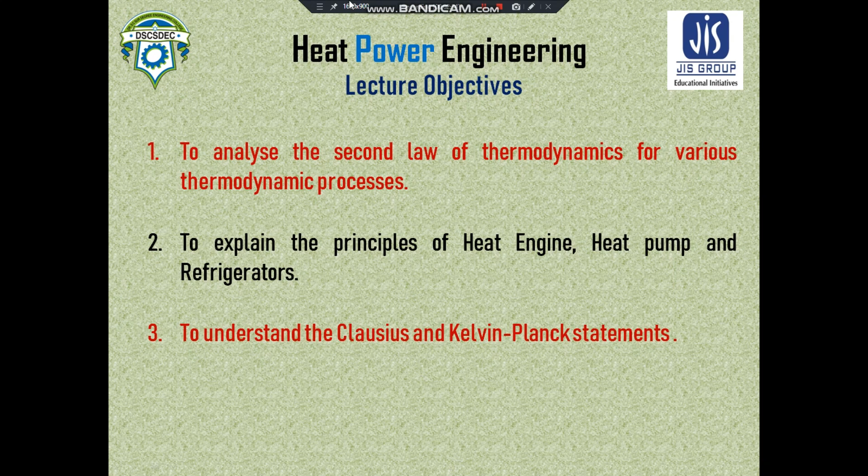Let us see how this can be understood. The first law of thermodynamics states that a certain energy balance will hold when a system undergoes a change of state or a thermodynamic process. But it does not give any information on whether the change of state or the process is at all feasible or not. So if you don't have the information about the feasibility of that process, you can't do the energy balance. This question is answered by the second law of thermodynamics.

Whether a process is feasible or not is a very important question. Suppose you are trying to create a design which involves some thermodynamic processes, but you don't know the possibility of occurrence of that process, whether it is at all possible or not. Then you can't move forward with that design, so you need to change it. If you don't have proper understanding about the second law, which is the most important axiom of the physical sciences, you can't move forward.

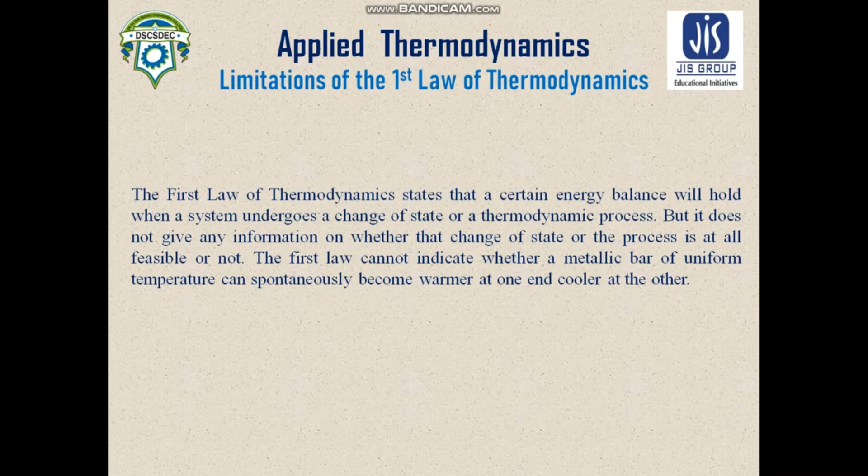Here is an example: the first law cannot indicate whether a metallic bar of uniform temperature can spontaneously become warmer at one end and cooler at the other. This can be a hypothetical process - a metallic bar is maintained at a uniform temperature, and someone proposes that it becomes warmer at one end and cooler at the other. This involves a thermodynamic process, but the first law can't answer this question. So to understand the possibility of occurrence, the feasibility of a thermodynamic process, we need to study the second law of thermodynamics.

So let us start with that. Before starting the discussion on thermodynamic processes, I would like to introduce the concept of directional constraints which are already involved with natural processes - that means in all possible natural processes, there is an inbuilt directional constraint.

Like water always flows from higher elevation to lower elevation. Heat always flows from higher temperature to lower temperature. Mass diffusion always takes place from the higher concentration to the lower concentration.

Here you can see a directional constraint which is always incorporated. This type of process is called a spontaneous or natural process. They have a directional constraint always incorporated within them, meaning you can change the direction of the process, but you can't specify that process as a natural one. So any spontaneous process has a natural directional constraint within it, meaning it can occur in a single direction only. To keep the process spontaneous, the directional constraints are always implied.

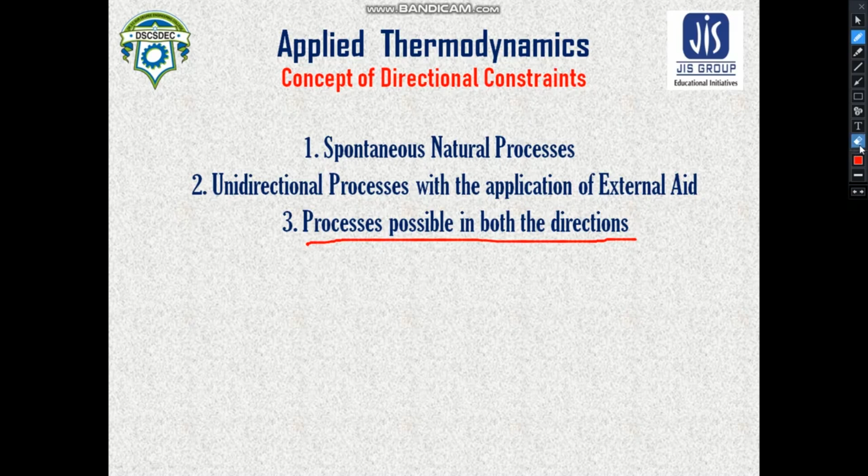These are examples of different thermodynamic processes that can occur, and in all of these cases there are some inbuilt directional constraints. This process can occur in a single direction, and if we need the opposite, there will be some directional constraints involved. If we discuss spontaneous processes, we always need an external effect to make possible the opposite of the spontaneous process. So if our wish is to make the opposite of the spontaneous process happen, we need to provide an external effect.

Now for processes that can occur in two possible directions, you'll see the surroundings gets permanently disturbed. This is the directional constraint involved here. Whatever you do, afterwards the surroundings will get disturbed, so no one can change it. This is going to happen. This is the directional constraint concept I would like to mention.

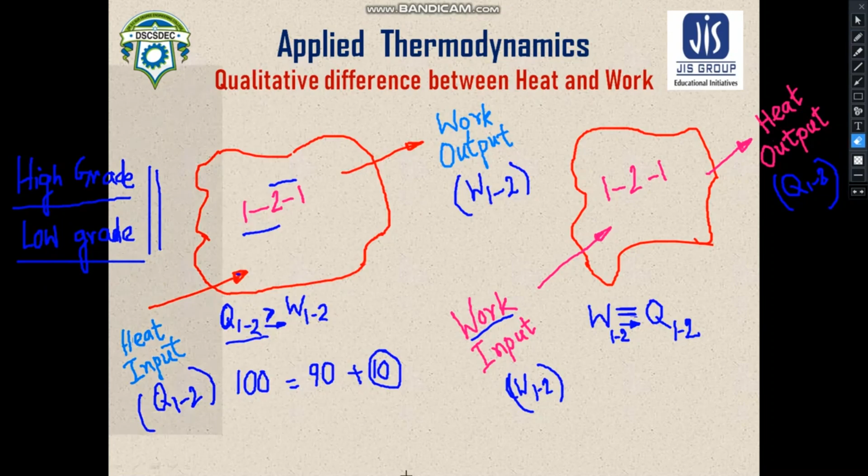Heat engine is a device where the system operates in a cyclic process to produce work when there is some heat input to the engine. So what does a heat engine do? It receives heat from the high temperature source, performs work, and rejects heat to the low temperature sink. Let us draw a cycle here.

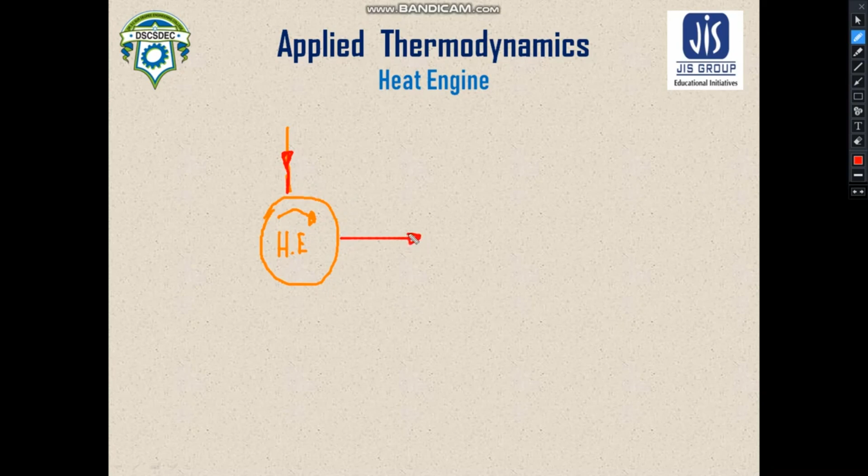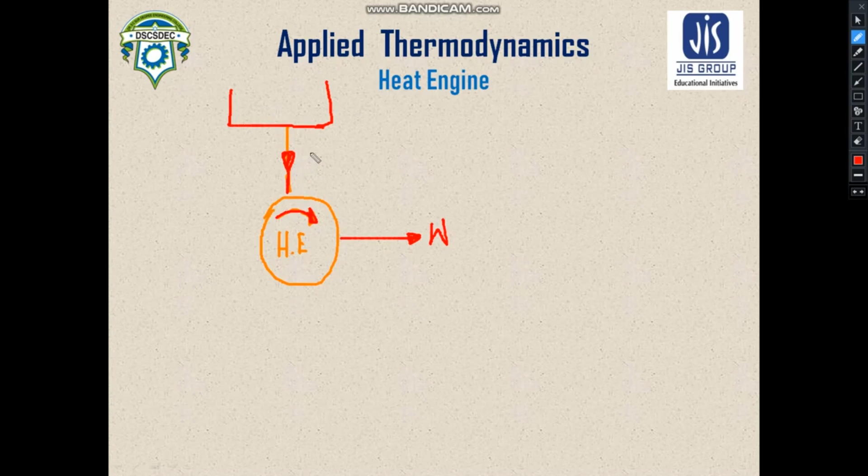Let us consider an engine working in a cyclic process. It takes heat and it is providing work. Now, how do you supply heat? The engine needs to be in contact with a high temperature body or high temperature system. We'll discuss these high temperature systems later on, but let us discuss the mechanism of heat engines. It takes heat from a high temperature reservoir and gives some work output, and the rest of the heat is rejected to a low temperature sink.

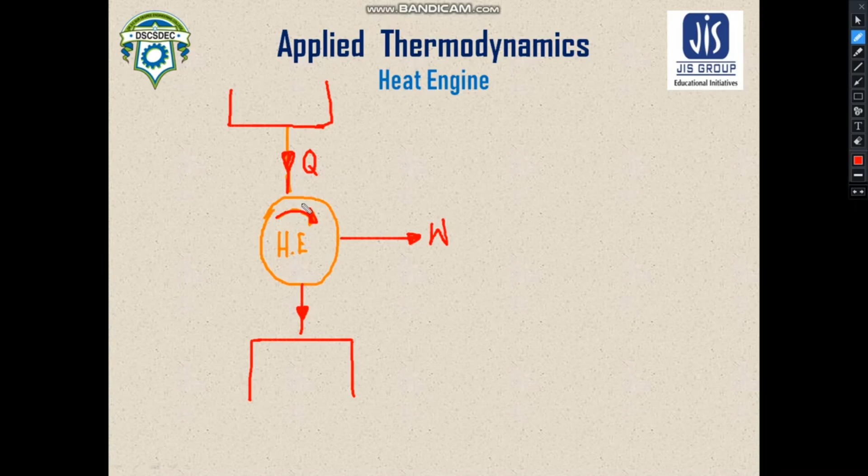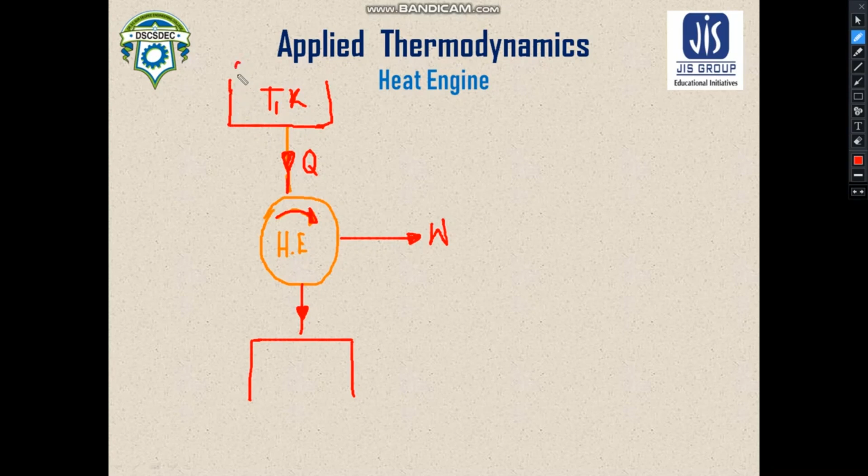So heat addition is taking place, which means this heat engine should be in contact with a high temperature reservoir. Let us assume the temperature of this high temperature reservoir is T1 K, and let us call this reservoir the source. Let us take this heat addition as Q1 and this heat rejection as Q2, and here is your low temperature reservoir, which we call the sink.

So what are the specialties of these thermal energy reservoirs? The source and sink are called thermal energy reservoirs. What are the specifications of these thermal energy reservoirs? They have infinite heat capacity, meaning that after a certain amount of heat transfer, the temperature doesn't change. It remains as it was earlier.

So we can take the examples of boilers or high temperature furnaces where the temperature remains constant. Boilers can be taken as the example of sources or high temperature reservoirs from which heat is rejected to the engines to perform some work, and after that the temperature remains constant. So there is no change in the temperature. They have infinite heat capacity.

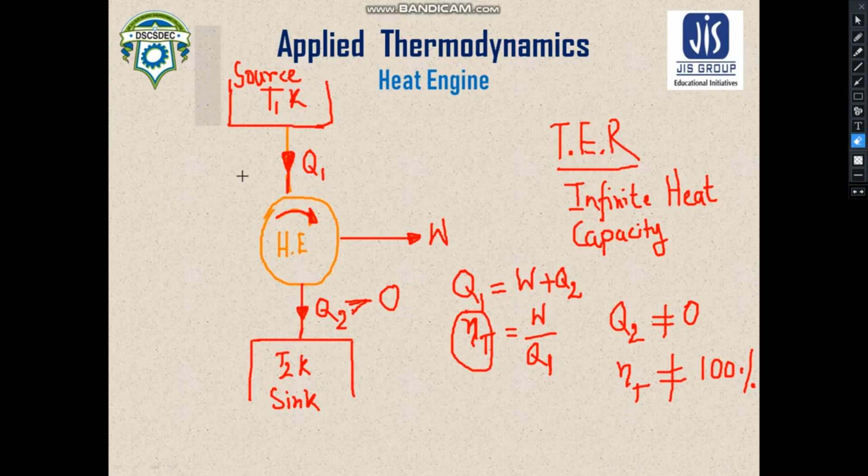Now from this understanding, let us see the Kelvin-Planck statement of the second law of thermodynamics. Here is the Kelvin-Planck statement: it is impossible for a heat engine to produce net work in a complete cycle if it exchanges heat only with a single fixed temperature. If we draw a heat engine, it will help you understand in a much better way.

So let us take this as the source, which is maintained at a temperature T1, and it is taking heat Q1 from the source. So this is your heat engine here.

So this is your heat engine here, and you see that this Q2 is equal to 0. So this is your W net, and here this W net becomes equal to the heat input, that is Q1.

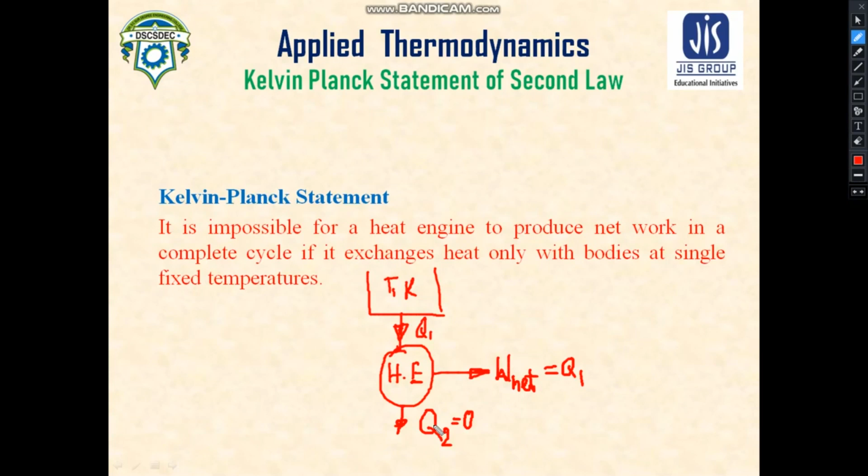Now I have told you earlier that this heat rejection can never be 0. That means it is impossible for a heat engine to produce net work in a complete cycle if it is exchanging heat only with bodies at a single fixed temperature. By this statement, it means the source. If the heat engine only interacts with the source, then it can't produce continuous work output, because there has to be some amount of heat rejection always, and to reject this heat there should be another body present with a different temperature. That means a sink should always be present. So whenever you see that there is no sink present, it doesn't accomplish that this engine can produce continuous work output. This is a very important statement of second law.

So with this understanding, let us deal with a hypothetical concept which we call as perpetual motion machine. So the diagram which I have shown you just a few minutes earlier, it is the same. So this is your heat engine. I will draw it in a much better way, I promise that.

Now this is your source which is maintained at T1 temperature, the absolute temperature is T1 Kelvin. It is receiving heat Q1 and it is rejecting nothing, that means this Q2 is 0. This we have just now discarded, which is not at all possible according to the Kelvin Planck principle discussed here. That means here you can see a hypothetical machine, a perpetual motion machine 2, which is interacting with the source only.

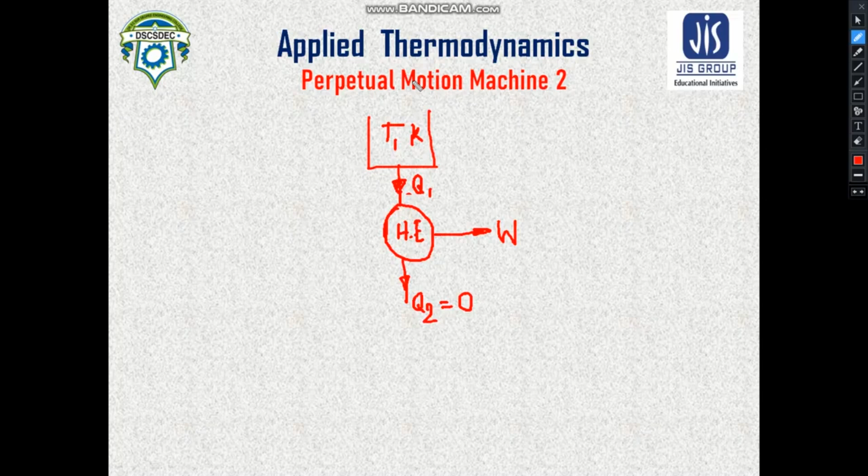That means it is interacting with the single fixed temperature and it is providing continuous work output. In other words, here you can see a heat engine which is 100% efficient. So these two statements, the engine is 100% efficient and it is only interacting with the source, these two statements are violating the Kelvin Planck statement of second law of thermodynamics. So this is perpetual motion machine 2; we have already seen perpetual motion machine 1 in case of first law of thermodynamics. From this understanding we can easily sense that this perpetual motion machine 2 cannot be practically done, it cannot be designed in practical cases. So there is nothing to discuss about this 100% efficiency. Heat engine can never obtain 100% efficiency.

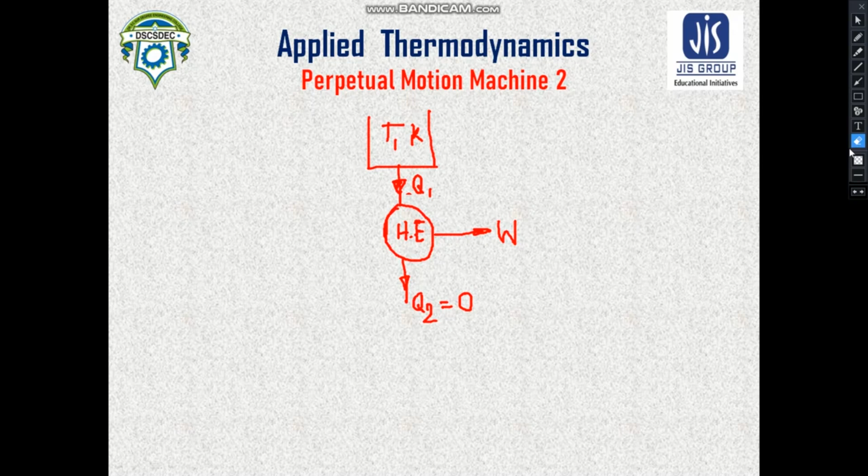So with this, let us see the reverse case of heat engine. In case of heat engines, we have seen that it is taking heat from a high temperature reservoir and it is rejecting heat to the low temperature reservoir, and within that it is giving some work output. So heat engine always takes heat from the high temperature reservoir and provides some work output, and after that some amount of heat is rejected. This is the basic mechanism by which a heat engine works.

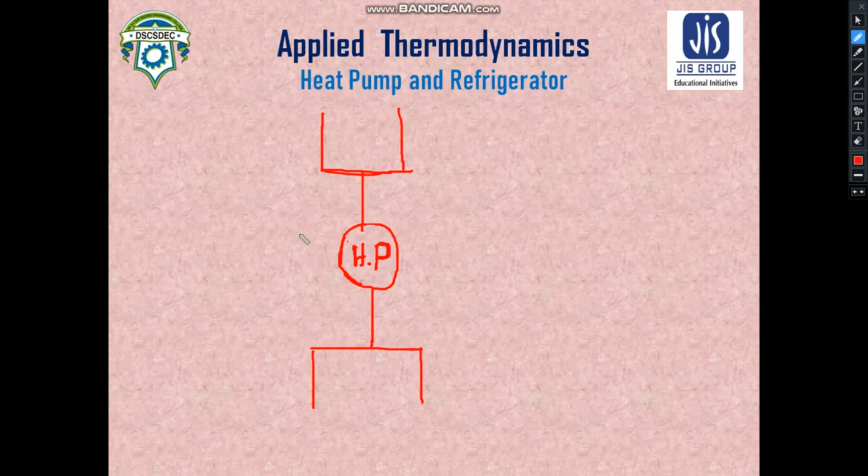Now let us take the opposite of the heat engine. Let us discuss what we mean by heat pumps or refrigerators. So this is your source. This is a general consideration that we take the source as T1 temperature and the sink is at T2 temperature. Since the source and sink have infinite thermal capacities, their temperature doesn't change.

So now let us do the opposite of heat engine. Heat engine was receiving heat from this high temperature source, right? Here the heat pump will receive heat from this low temperature sink, and it will reject heat to the high temperature source. Now you know that heat can't flow from low temperature to high temperature, so obviously T1 is greater than T2. If I haven't mentioned T1 greater than T2 in the case of heat engines, please check it and correct it, because if T1 is not greater than T2, then this heat engine or heat pump will not work. It is already given, it is a perfect assumption. So now let us move on to the discussion of heat pump.

A heat pump takes heat from a low temperature reservoir maintained at T2 Kelvin, and rejects heat to the high temperature source maintained at T1 Kelvin. Now this is exactly opposite to the spontaneous process, meaning heat can't spontaneously flow from low temperature to high temperature.

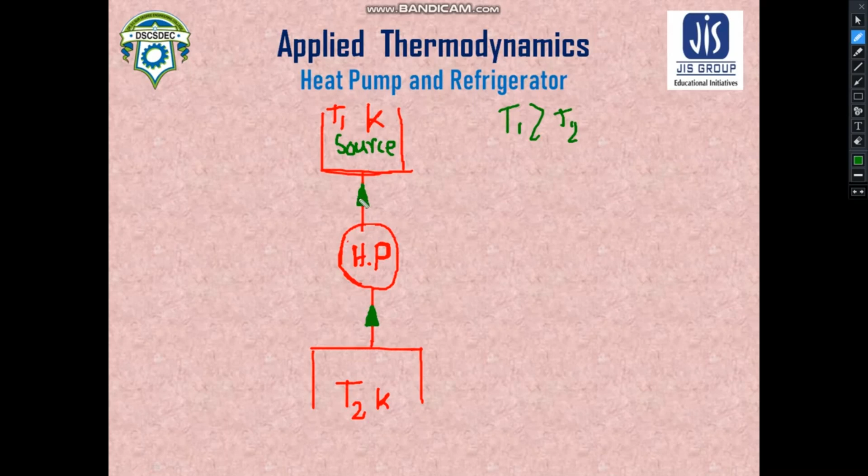So you are trying to act against nature. How can you do it? You need to put some external effect. This external effect is the work input to the heat pump. Until you provide this external work input, the heat pump will not be able to transfer heat from the low temperature reservoir to the high temperature reservoir.

Let us take this heat which is transferred as Q2 and Q1. If we perform the energy balance, you will see W is your work input, and this is Q2, which will be equal to Q1. This is the basic energy balance. Here W is the work input, so that the heat pump can transfer this low temperature heat.

There is work input to the heat pump, so that it can transfer this Q2 heat from the low temperature reservoir to the high temperature reservoir. So this W and Q2 were your energy inputs, and Q1 is your energy output.

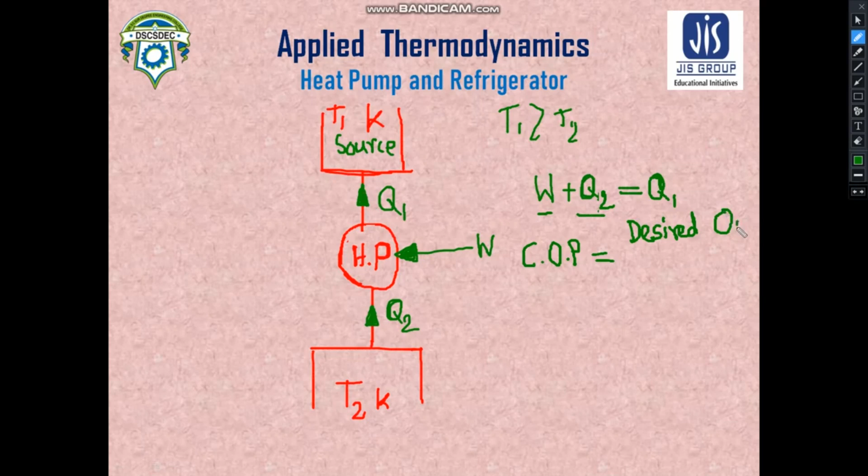So how do we measure the performance of a heat pump? To measure its performance, we define a term COP, called the coefficient of performance. COP is defined by the ratio of desired output divided by work input.

Now what is your desired output here? Your desired output is to transfer this Q2 heat, and for that purpose W work is given as input, and finally this Q1 heat, the high temperature heat, is rejected to the high temperature source. So your desired effect, when we are concerned about this high temperature heat Q1, the device is called a heat pump.

When we are concerned about this low temperature heat, the device is called a refrigerator. A heat pump is used when you need to keep your room warm and the surroundings is at lower temperature. Heat will flow from your room to the surroundings at a certain fixed rate. Now you provide some external heat input to your room so that it balances the heat going outwards. Here comes the importance of a heat pump: by its help, you can transfer heat into your room so that it balances exactly the heat going out to the surroundings.

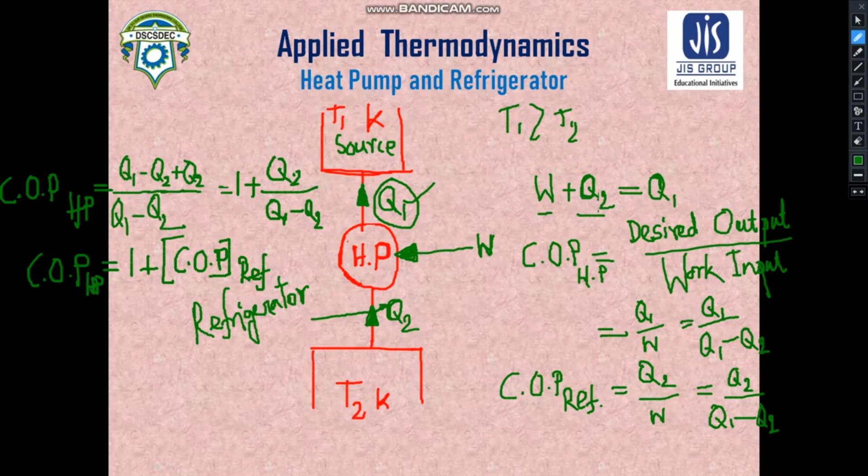So I hope you have understood properly that heat engine and heat pump have completely different methods of operation. They operate exactly opposite to each other. The method applied in the cases of heat pump and heat engine are completely different from each other.

So now it is quite understandable, we have had a lot of discussion for the last 40 or 50 minutes. So it should be evident and absolutely clear that the heat which is being transferred as the input energy cannot be completely converted into work. There should be always some amount of heat rejection. These are the natural laws which must be understood.

So while doing the summary of this second law of thermodynamics, I have written three factors which you should remember for the rest of your life. Heat cannot be completely converted into work. The energies which cannot be completely converted into high grade energies are called low grade energies. So, as information, low grade energies cannot be completely converted into high grade energy.

Now it is evident that heat is an example of low grade energy, whereas work is an example of high grade energy. So low grade energy cannot be completely converted into high grade energy. Heat cannot be completely converted into work.

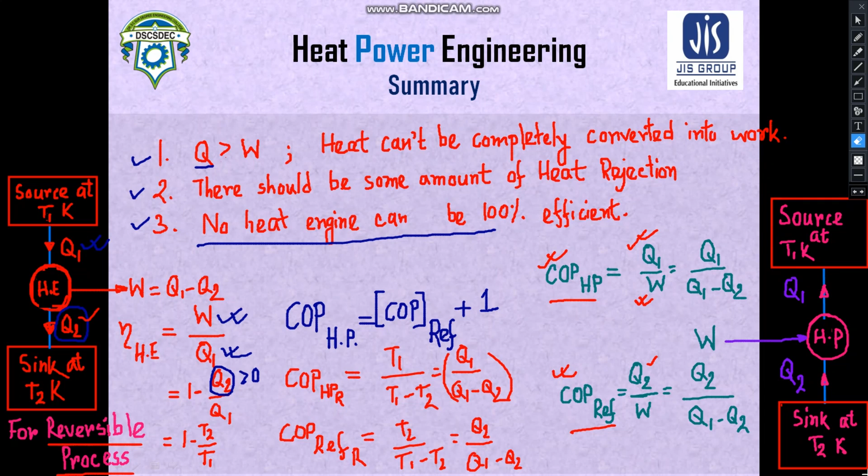Because if you don't have a proper concept with this, you won't be able to understand thermodynamics at all. So please concentrate on these lectures and understand the things properly.